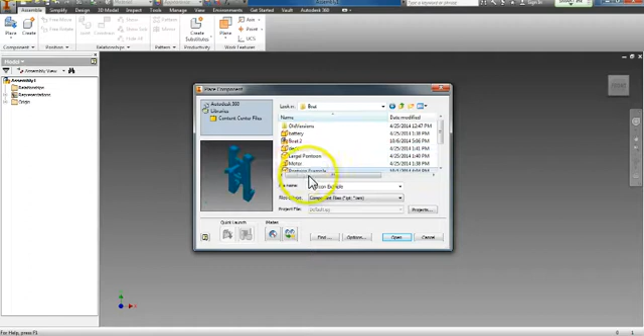To start, I'm going to go to the upper left corner, click Place, and find where I have my item saved at. In this case, I have mine saved in a special location. There it is, so I find where my boat hull was saved. It'll look pretty big to start, so I'm going to zoom out. I'll click in one spot, place one of my boat hulls, then click Escape on the keyboard.

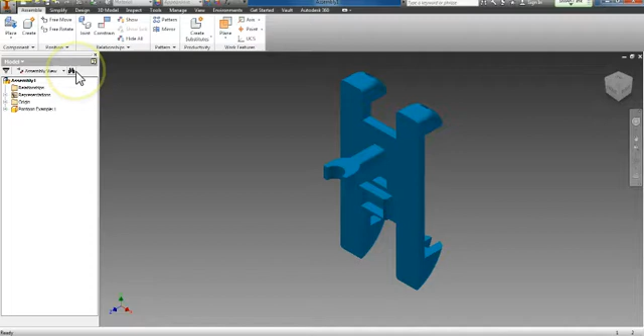Now I'm going to place my components. The components are found in the student shared folder. Make sure you copy them from the student shared folder into your school drive. Once you have them there, I'm not going to demonstrate how to do that, I'm just going to show you how to put them all together. So I'm going to go back to Place, find where I saved my parts at. And here are my parts.

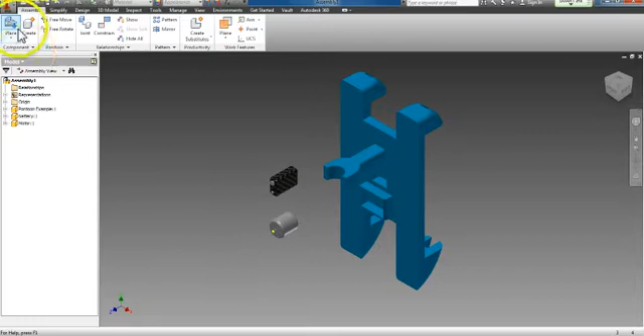I'm going to place the one battery. I click Battery, click once, click Escape on the keyboard, go back to Place. I'm going to place the motor, place one motor, Escape on the keyboard. I'm going to place a propeller, place one of those, Escape on the keyboard. Then finally I'm going to go back to Place, and I'm going to place a switch. Now I'm going to click Escape on the keyboard.

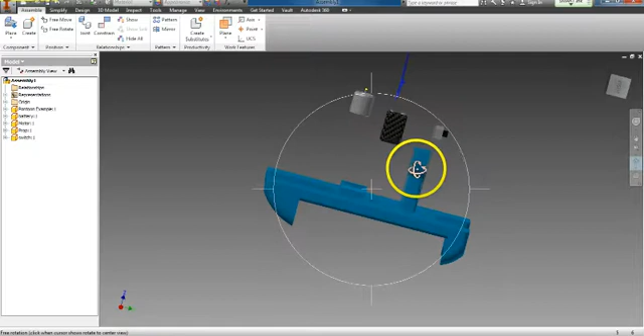Now I have my four items that I need to put together. I'm going to rotate my boat around so that I can see it a little bit better. Alright, so I'm going to look at it like this, I think. Escape to get out of there.

Now the first thing I'm going to put on is my motor, and I'm going to move my motor over here, and I want to rotate my motor so that it fits a little bit nicer in this. So I'm going to right click on the motor, and click Free Rotate. Free Rotate allows me to just rotate that motor. I'm going to rotate it so it's in the direction that it's going to go in. Click Escape.

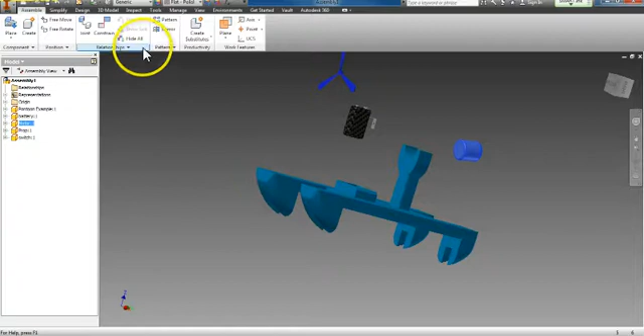Now I'm going to constrain that motor, lock it into place. First thing I need to do is click Constrain, and I'm going to use the Mate function, that's this one here. I'm going to zoom in on my motor and highlight the axis. See that long short dashed line? That's where I want to click once I have that selected. So I'm going to click on the axis of the motor, find the axis of my engine hole here. That's where I want to put it. Click there, and it'll automatically go in.

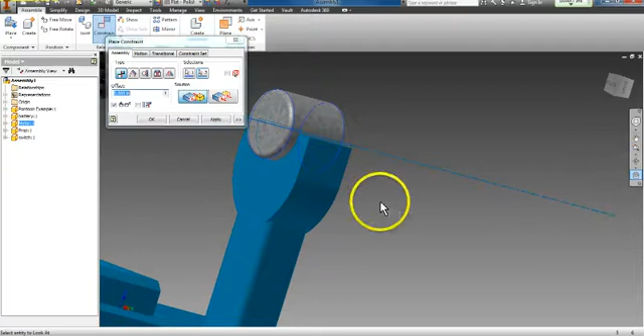I'm going to rotate around and look at this side, so I'm going to tip that up right. Okay, now it's a little bit further back than I want it, but that's fine, we'll change that later. Click Apply.

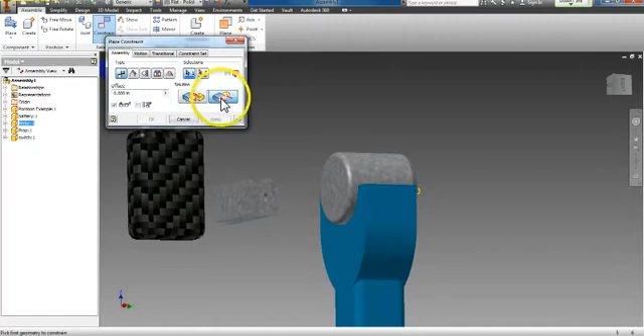Now, if you'll notice, my motor can slide back and forth, but I don't want it to move at all. So I'm going to do another constraint. I'm going to rotate around so I can see the back side of it. I'm going to use the Constrain tool again, and this time I'm going to select Flush. The Flush tool is under the Mate option. Select that. I'm going to flush the back of the motor with the back of the motor stand.

I'm going to look at this side, and I notice I don't want my motor back quite that far. I'm going to use the Offset tool up here, right here is the offset. I'm going to type in an offset of 0.25, and I went the wrong way.

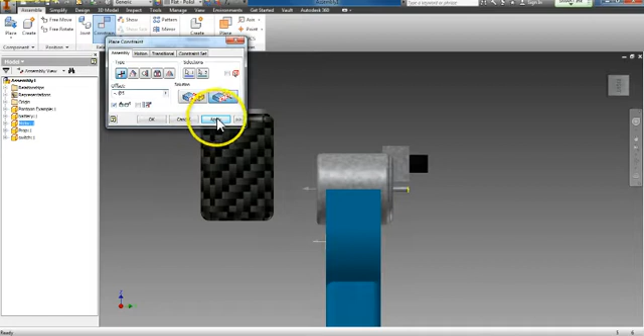Next thing I want to constrain is my propeller onto my motor shaft. For that, I'm going to use the Constrain tool. I'll go over here and use the Insert function. I'll zoom into the end of my motor and select the end of the motor shaft, then zoom out.

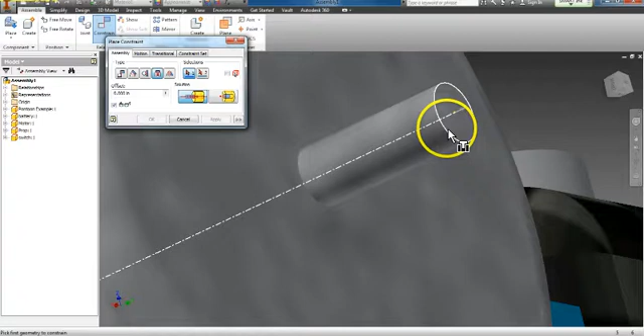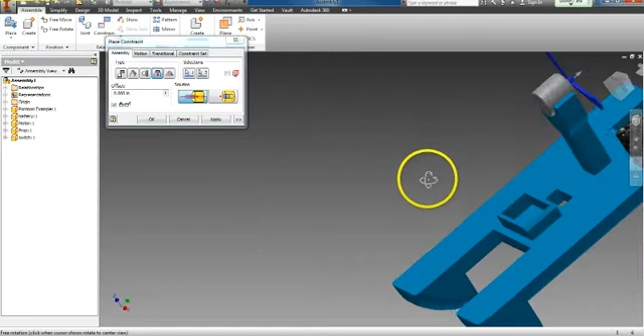I need to rotate around so I can see inside of my propeller. Going nice and slow, there's the propeller right here. I'm going to zoom into that, and I want the back of the propeller. This is inside that propeller hole, so I'll click there. I'm going to zoom out again so we can see what's going on, and rotate around to see it. That looks pretty good, I'll zoom in on it.

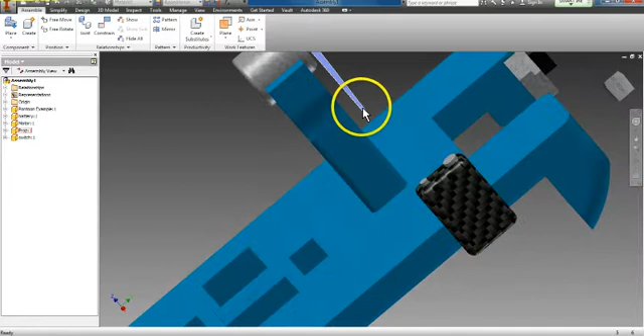I could offset that a little bit. I could put a 0.01 in there. Oh, wrong direction, so we'll go negative. Now it looks like it's pressed on there a little bit. Maybe I could go a touch more, like 0.03, and then click apply. Now my propeller is on there, and I can spin the propeller while the boat doesn't move.

Next thing I want to constrain is my battery. I'm going to put the battery in this battery box down here. I'll click constrain, and this time use the Mate function. It's kind of like the glue button, gluing two pieces together.

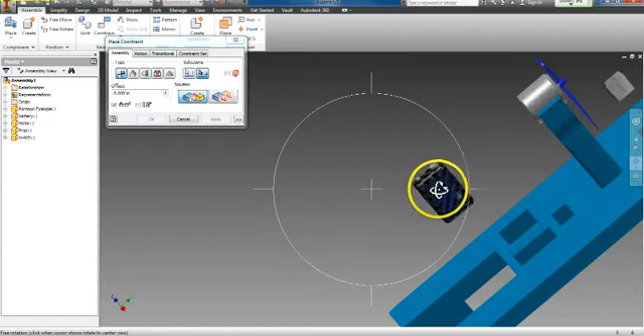So I want to glue the bottom of my battery into the bottom of the battery box. I'm going to rotate down just a little bit, and this is the area I want to constrain to. I'll get that highlighted, click there, my battery goes there, click apply. Now I can move it around.

So I want to constrain the side of my battery. I'm back to constrain, and I still want the Mate function - the side of my battery with the corresponding side of the battery box, which happens to be this side. I'm going to apply that.

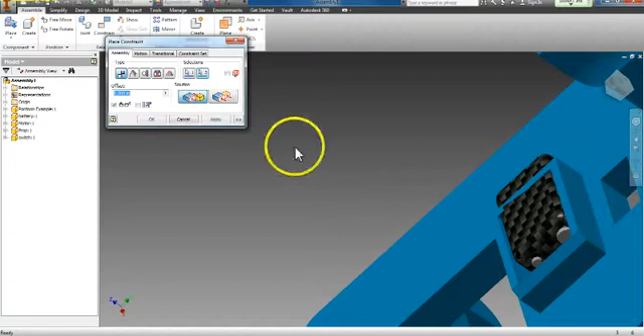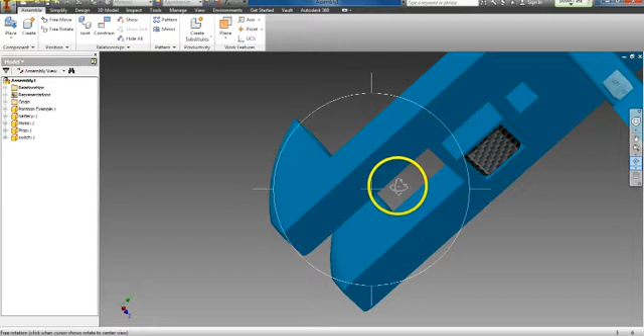And now I'm going to constrain the front of my battery, rotate around to that corresponding side of my battery box. This one's a little bit more difficult to see. There it is, it's this side here. Click apply. Now I'm going to zoom out, and we can see that my battery is in the battery box. When I move it, the whole boat moves with it.

Now the last thing I have to constrain is my switch. Again, we want a flush mounted switch, meaning this boxy part is down inside of the boat hull. So we're back to constrain, and I'm going to use the glue function - gluing the bottom of that switch to the top of my boat hull.

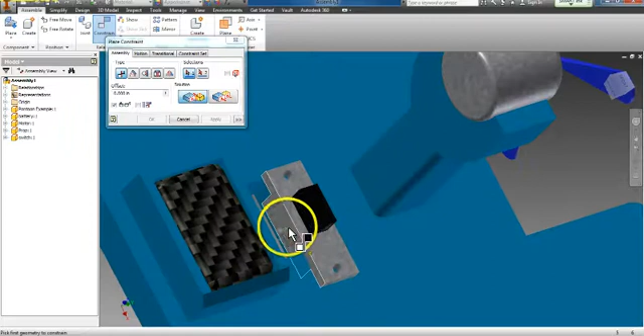Click apply. I'm going to glue the side of my switch to the side of the switch hole, which happens to be right there, the corresponding side. Click apply. And now if you notice, the switch can still move.

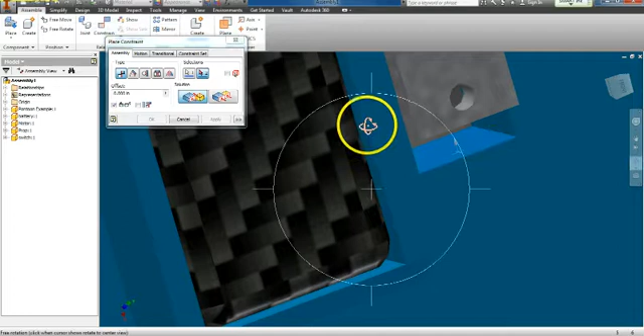So I'm going to go up to constrain and glue together, using the mate function - the side of the hole where the switch is, as well as the end of the switch. I'm going to zoom out just a little here to find the end of the switch.

I'm going to glue those together, but now if I look at the top, I want it to be offset a little bit. So in my offset, I'm going to go 0.25 - and actually, we want that to be a negative 0.25. That looks pretty centered according to the battery.

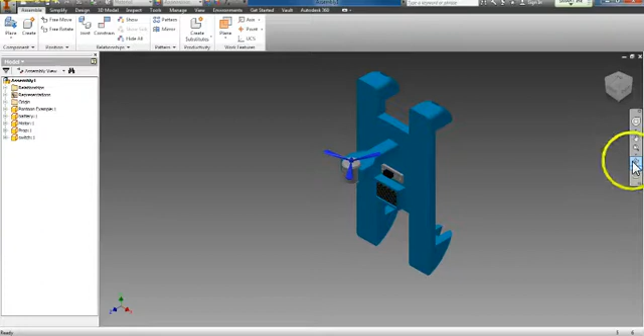Click apply. I'm going to go back home. And now, looking at my boat, I have all of my components mounted onto the hull. They're all constrained properly.